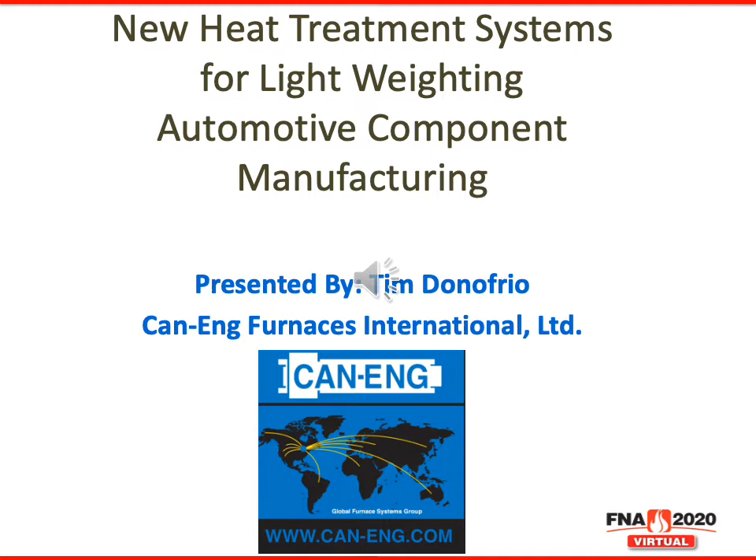The automotive and mobility market is in a state of flux, which puts greater demands on thermal processing service and equipment providers. This presentation will outline the mobility market lightweighting trends we see today, a focus on recent advancements in the use of aluminum components and product applications in vehicles, a review of thermal processes, both conventional and newly developed applications for these lightweighting components, the challenges associated with the new aluminum component thermal processing solutions, and in closing, a review of what's headed down the technology pipeline. What will the future challenges be for both processors and equipment builders?

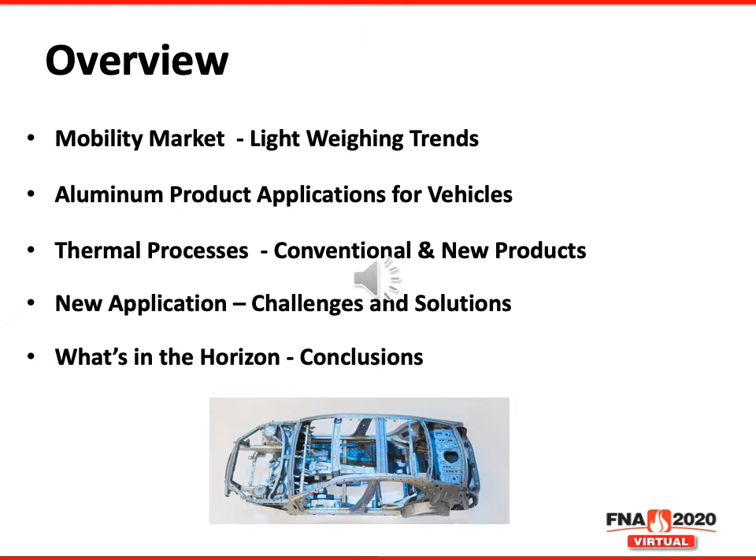Lightweighting trends for aluminum vehicle components. There should be no surprise that there's been a constant push to reduce the overall weight of vehicles as a means of reducing fuel consumption as well as emissions. The Center for Climate and Energy Solutions reports the transportation sector is the largest direct source of U.S. greenhouse gas emissions, surpassing the power sector in 2015. Cars and light-duty trucks, including pickups and SUVs, are responsible for about 59% of transportation emissions, while medium and heavy-duty vehicles, which include tractor-trailers, large pickup trucks, vans, delivery trucks, buses, etc., produce about 23% of the transportation emissions.

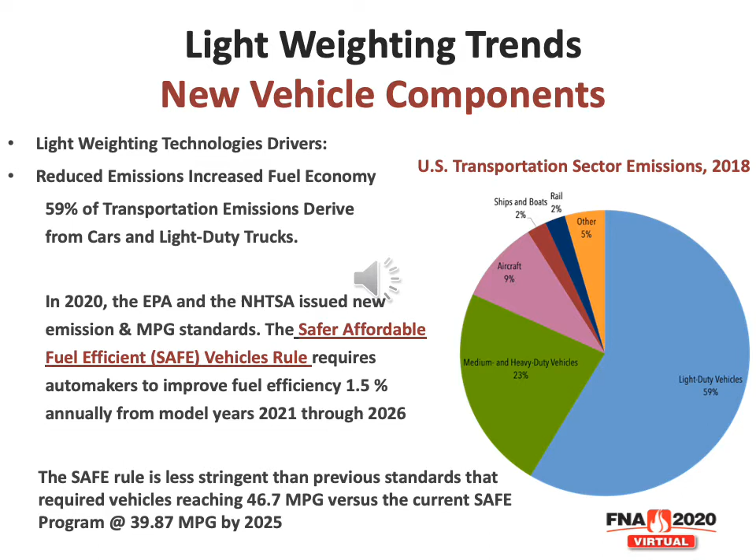In March 2020, the EPA and the National Highway Traffic Safety Administration issued new greenhouse gas emission standards and fuel economy standards for new passenger cars and light-duty trucks. The Safer Affordable Fuel-Efficient Vehicles rule, known as the SAFE rule, requires automakers to improve fuel efficiency 1.5% annually for model years 2021 through 2026. The SAFE rule is less stringent than the Obama-era rule it replaced. That rule would have required automakers to improve fuel efficiency 5% annually for model years 2020 to 2025, reaching 46 miles per gallon by 2025, versus the current SAFE program, which requires 39.87 miles per gallon by 2025.

The most significant trend in the mobility market is the increased number of electrified vehicles produced. The automobile industry has been a beacon for technological innovation and a guiding light in how people change the way they live. The time for change has come again, and some report that the levels of mobility change coming over the next 10 years are likely to exceed those of the previous 50 years. Key to these developments are four trends most easily remembered by the acronym ACES: autonomous driving, connectivity, the electrification of vehicles, and shared mobility.

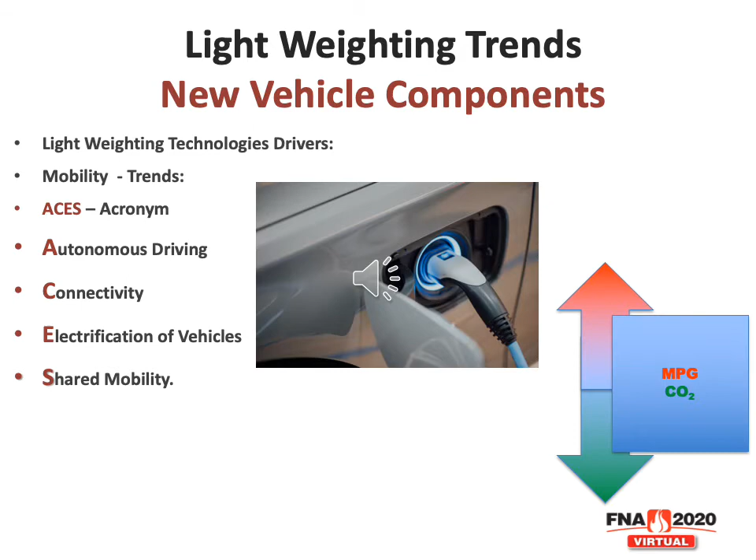With all good technologies, there comes a time when buying the alternative no longer makes sense, as with cell phones in the past, or even color TVs in the 1970s. Predicting the timing of these shifts is difficult, but when it happens, the whole world changes. It has become clear that the 2020s will be the decade of the electric car. According to Bloomberg New Energy Finance, battery prices fell significantly and are on path to make unsubsidized electric vehicles as affordable as their internal combustion engine counterparts in the near future. This will start the mass market liftoff for electric cars, which is predicted around 2022. Furthermore, by 2040, long-range electric cars will cost less than $22,000 in today's dollars, according to these projections, where 35% of new cars worldwide will be plug-in.

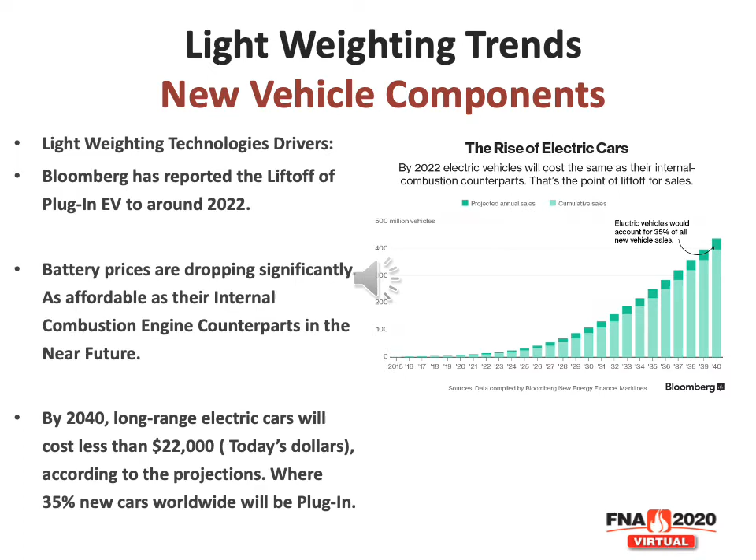As vehicle manufacturers today push the envelope of lightweighting technologies, so do they impart opportunities for the development of new products, materials, manufacturing methods, and new thermal processing technologies. According to vehicle designers, a 10% reduction in vehicle mass equates to approximately 6 to 8% reduction in vehicle energy requirements, which does promote enhanced electric vehicle range capability. However, downsizing has its limits, which is leading developers to seek out new approaches to managing these new components. The vehicle body accounts for approximately 1/3 of vehicle mass, which includes body-in-white components. Advancements in lighter weight body structures through the use of ultra high strength steels, carbon fibers, aluminum, magnesium, and new joining technologies are all being used today as a means of reducing automobile mass.

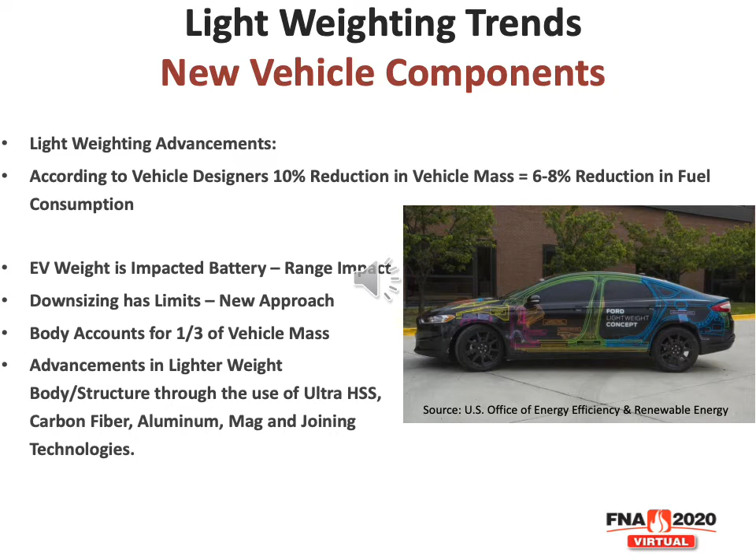In an era of lightweighting technology advancement, we see a common trend where steel components are being replaced with lighter weight aluminum components. We see automotive manufacturers expanding the use of lightweight technologies and exploiting the use of aluminum materials in high volume vehicle assemblies. Traditionally, we have seen aluminum incorporated into various forms such as powertrain castings and suspensions, as well as sheet and extruded shapes for the body, externals, and bumper structures. But today we see lightweighting materials being incorporated into high-volume automotive platforms in the form of thin-walled structural node castings or body structure extrusion stampings. Examples of this can be seen in the F-150 truck platform conversion to aluminum. Through the integration of lightweight aluminum panels and structures, engineers yielded benefits in smaller powertrains to drive the vehicle, reduced suspension burden, and less elaborate structures.

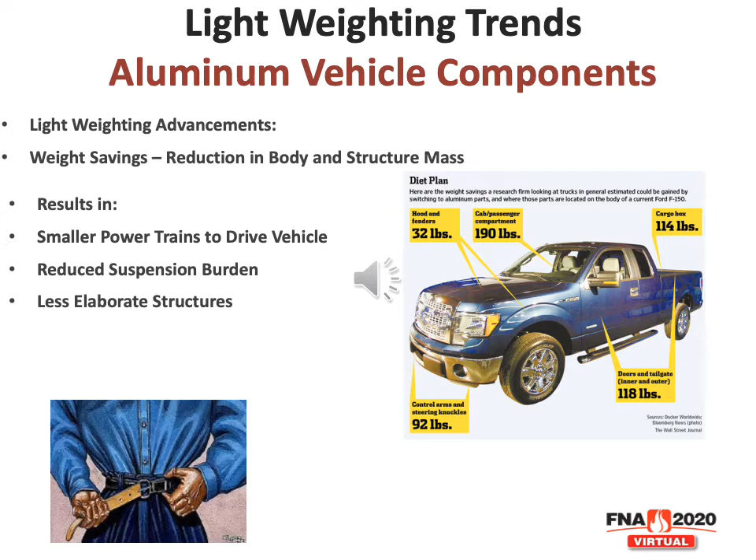By 2020, net aluminum demand is expected to increase to 570 pounds per vehicle, due to the increases for all vehicles utilizing aluminum enclosures, body-in-white, and chassis components. These demands are a result of manufacturers' desire to meet long-range greenhouse gas emissions goals, as well as satisfying the ramp-up of electrified powertrain and battery electric vehicle platforms, which use greater amounts of aluminum sheet, extrusions, and castings for weight savings to achieve the range targets. It is also reported that body enclosure components will make up the largest growth potential moving forward.

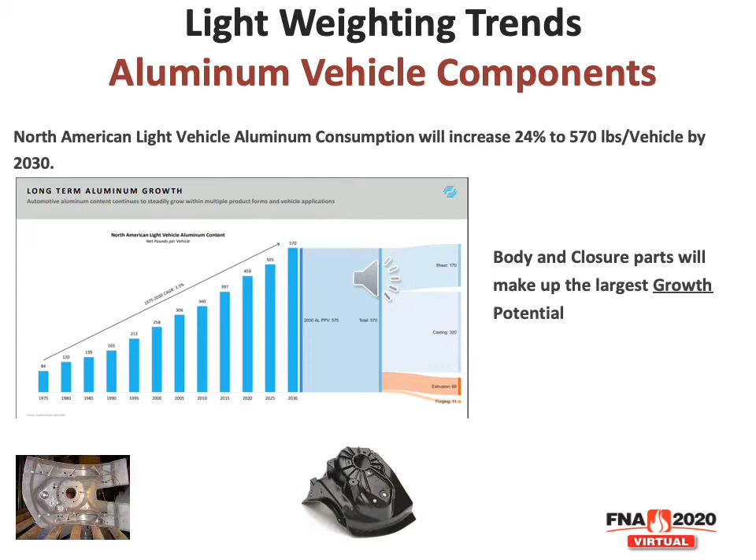Vehicle manufacturers today integrate aluminum components in considerable applications that include closures, body-in-white, chassis, powertrain, driveline, transmission, heat management, braking systems, steering, wheels, and trim, some of which are covered in the images shown in this slide. This presentation will focus on new thin-walled casting components used in vehicles today as part of structural and crash management system components, body-in-white, chassis, and electric vehicle components such as battery cases.

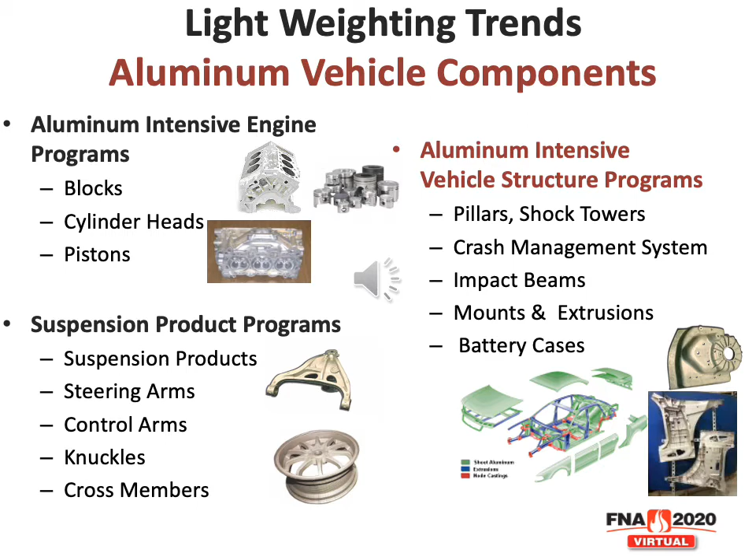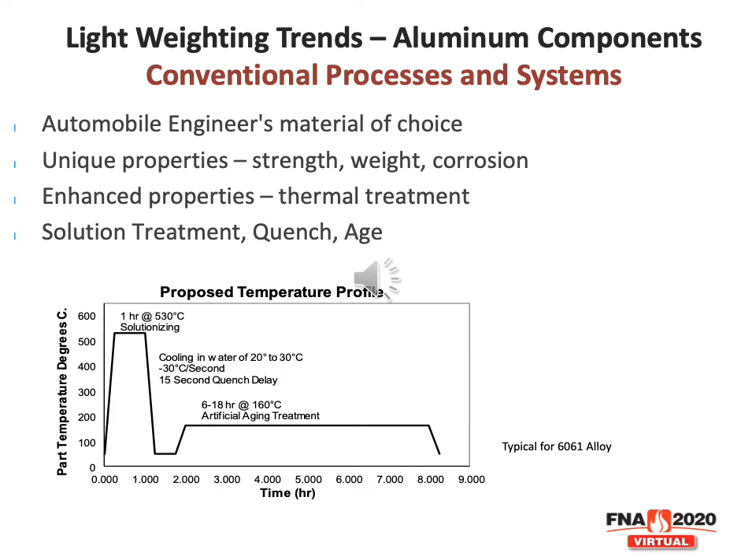Aluminum has been a highly recommended source material for castings by vehicle engineers for lightweighting applications, largely due to unique strength, weight, and corrosion properties. Furthermore, casting properties can be enhanced through novel casting methods such as vacuum high-pressure die casting and post-casting thermal treatment processes, which can be tailored to provide the engineer with a lighter, cost-effective alternative possessing strength and ductility performance levels that are comparable to previously developed steel stampings and/or multi-component fabricated assemblies.

The implementation of newly developed aluminum components into automobiles does come with its challenges, which will need to be overcome in order to be successfully implemented. This paper examines the following: challenges developing non-traditional thermal heat treatment processes for new aluminum castings developed to replace the previous high-strength steel family of fabricated stampings, traditional thermal processing options available to manufacturers of body components, and the challenges associated with developing new heat treatment processes, an overview of newly developed thermal processing system concepts which can achieve property and physical requirements, a focus on new quenching technologies for aluminum castings, and how new heat treatment processes can be integrated into high volume vehicle manufacturing processes.

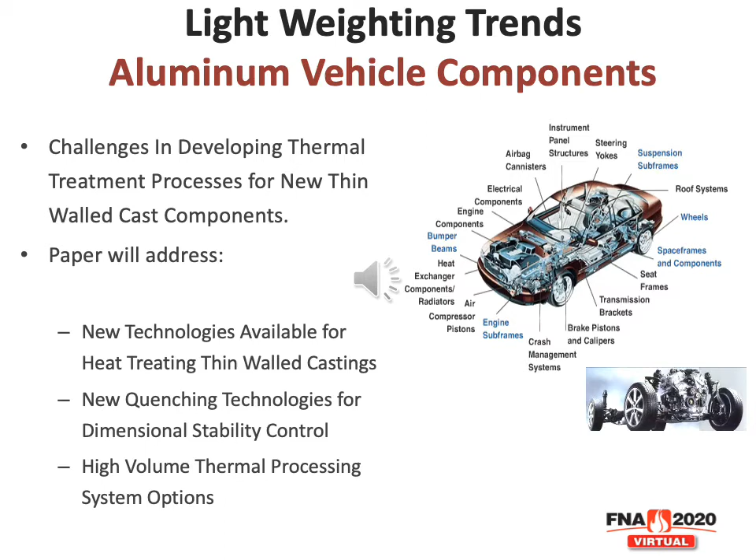The following slide represents a conventional batch type thermal processing system. In this system, parts are generally loaded into fixtures, trays, or racks and delivered to the heat treatment system by an operator, typically via a fork truck. These loads, or charges as thermal processors call them, are then individually heated and, depending on the material's alloy and property requirements, are held at temperature for various times, allowing the alloy to homogenize and then potentially discharged rapidly to a quench system. Again, the properties will dictate the thermal process required. This method is acceptable for small capacities or for thermal processors that require a high degree of process parameter flexibility, where they need to change time, temperature, and quenching methods between individual batches on a regular basis. However, it must be known that this is the least efficient system for high volume processing.

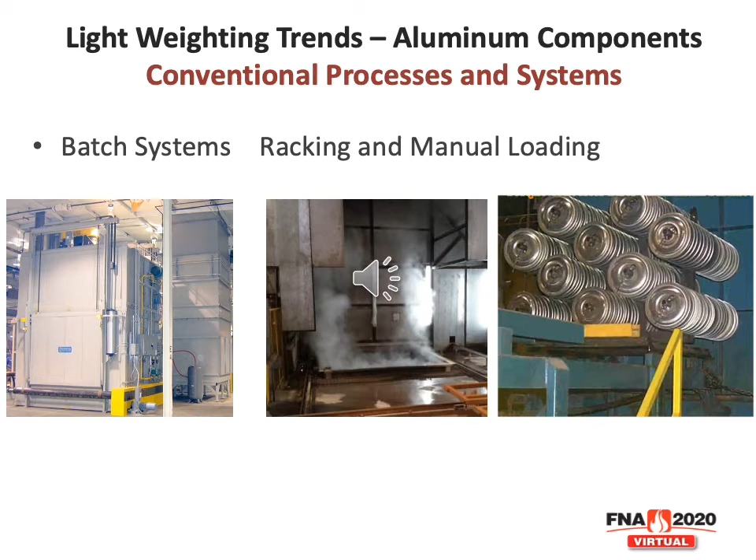The following heat treatment system represents a conventional T6 type thermal processing system. In this system, parts are loaded into fixtures, trays, or racks and delivered to the heat treatment system. These loads or charges enter the system and traverse or convey through the various solution heating and soaking zones, subsequently through a quenching stage, and finish through post-quench artificial aging, heating, and soaking zones until they are finally discharged at the opposite end of the system. This particular layout shows an inline concept. However, these systems can be arranged in a multitude of configurations. They can be arranged in a U-shaped layout or even an over-under configuration where the solution furnace is positioned above the aging furnace. Conventional conveyance systems include roller hearth, walking beam, conveyor belt, pusher, and overhead rail transfer systems as a means of conveying baskets, charges, and loads through the solution, quench, and age portions of an aluminum heat treatment process.

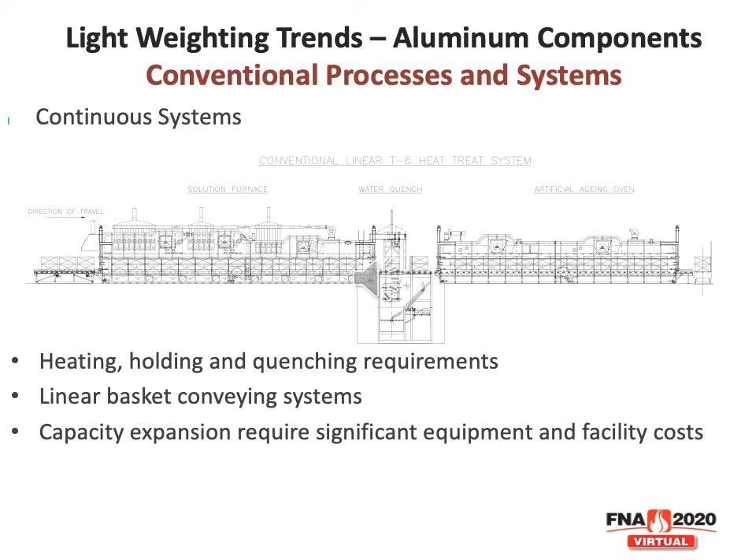Conventional linear conveyorized T7 systems consume considerable floor space, and when integrated with the quench system are significant in size and energy demand to provide the quenching capability for large mass baskets or racks. Facility infrastructure requirements are large, as well as the work in process inventory requirements to keep the system fed and backed up continuously. Energy consumption is quite significant for long linear conventional T7, T6 systems, mainly due to their large external surface area conduction losses, additional conveyor roll conduction losses, and door opening losses as a result of large baskets and trays. In addition, conveyance systems can be complicated and costly to maintain over time, as they involve many internal moving parts, are subject to thermal stresses, and integrate considerable lengths of drivetrain and drive units that constantly require attention and maintenance. Thin-walled, high-integrity casting product can be at a disadvantage as a result of heating and quenching large racks with a large number of castings loaded into it through a conventional system.

This is a result of large, dense loading of baskets and the challenges in developing uniform heating and holding of temperatures for the critical T7 process. Furthermore, the most important step in the process, which involves water quenching, can be greatly compromised by these challenges in rapidly conveying a large rack from the discharge of the solution to the quench station in the required time, and in addition, the uniform and rapid quenching can be compromised by the lack of developed quench flow through the rack due to the size of the rack and/or density of loading of that rack.

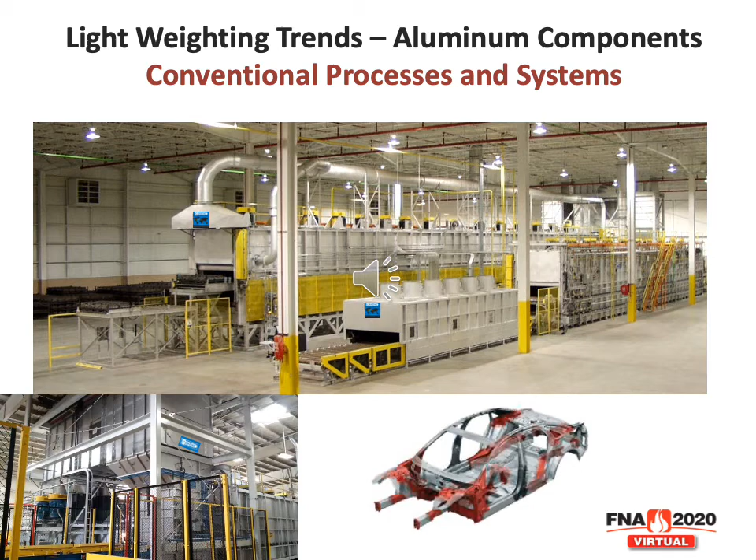In collaboration with the industry and in determining the needs of the manufacturers and processors, it was clear that they were looking for support in meeting the demands of their customers and satisfying the quality and cost pressures put upon them. Their main concerns regarding a new efficient heat treatment system for thin-walled structural components included that the system provided efficient and flexible geometry processing capability. Essentially, the system must be flexible in terms of processing parameters, as well as processing type of part and the geometry that could be processed.

Furthermore, manufacturers were looking for a system that essentially reduced their work in process inventories between operations. Essentially, a system that's capable of being closely coupled with the upstream and downstream processes, thereby minimizing the amount of inventories required between operations. A high level of importance was placed also upon ensuring the system provided best technology available for part dimensional accuracy, essentially utilizing in-house know-how and experience in preventing or minimizing part distortion as a result of the thermal process, which could minimize or eliminate the need for post-heat treatment processes, especially important for large components such as battery cases where their corresponding component mating surfaces need to accurately fit.

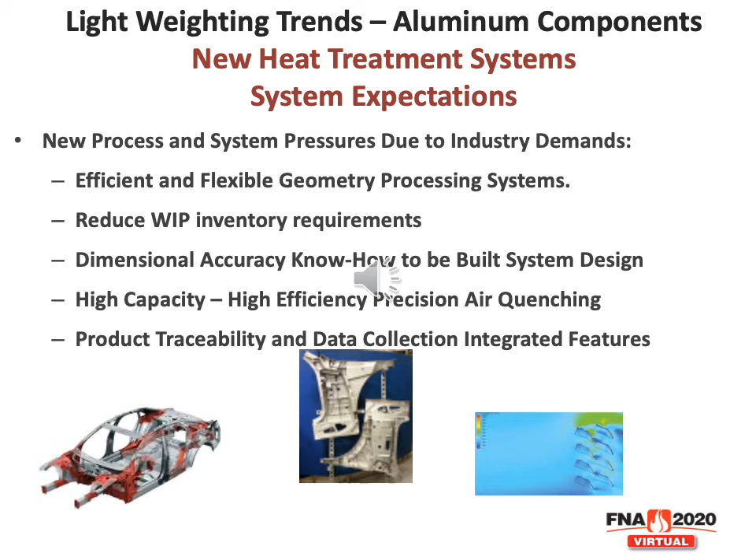Today, there are new, more efficient thermal treatment options available to manufacturers and processors of high-integrity, thin-walled structural vehicle castings. Through the development engineering of an existing rotary hearth technology, including robotic handling and precision air quenching technology, there are now options available that eliminate the challenges and inefficiencies plagued by operating a long linear T7 structural casting heat treatment system.

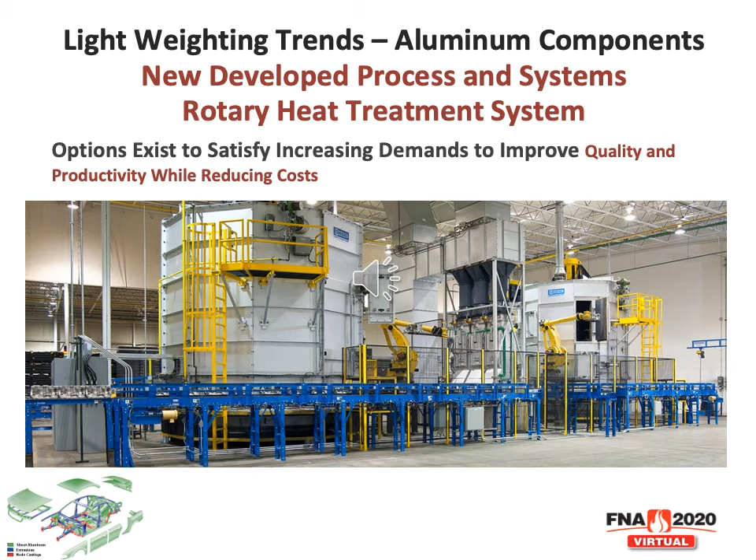In a recent applications engineering review, the linear conveying system was evaluated alongside the rotary hearth conveying system for space analysis. When laying out both systems of equal capacity, the rotary hearth concept is clearly more space efficient, requiring 35% less space than the continuous roller hearth linear conveying system. Furthermore, when comparing the system's overall conduction energy losses, the rotary hearth system provided greater efficiency over the linear roller hearth design as a function of space benefits.

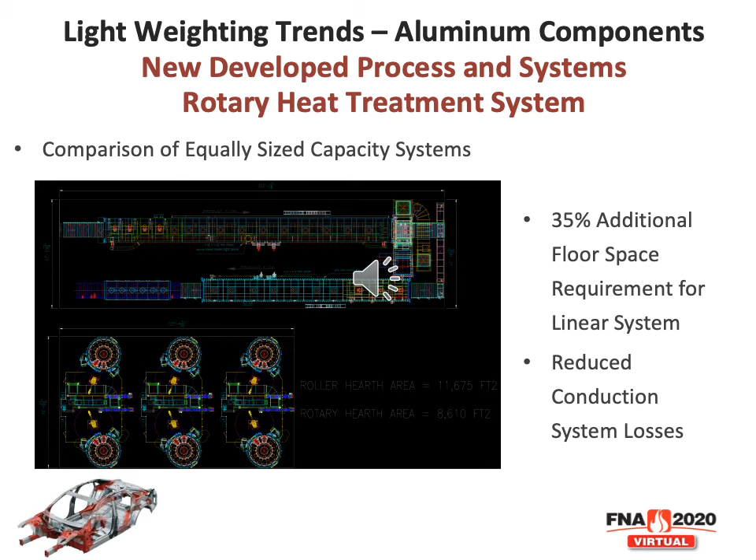These newly configured heat treatment systems offer processors both captive and commercial benefits over conventional methods when processing newly developed lightweight aluminum vehicle components. The rotary hearth heat treatment system described in this presentation just demonstrates an example of newly developed methods for processing lightweight aluminum vehicle components that improve quality and productivity while also reducing the cost pressures which processors are under.

These benefits include more compact design, less floor space required compared to conventional processes, reduced fixturing and racking mass requirements as a result of processing smaller batches, reduced cycle times associated with a more efficient heat up of smaller batches, more efficient smaller quench systems that require less floor space, infrastructure, or facility burden requirements, as well as lower horsepower requirements. Through the integration of robotic automation, minimal heat treat operator requirements, and through the integration with upstream and downstream processes, these systems do reduce work in process inventories and are considered true lean manufacturing cells.

Reduced energy consumption and emission potential, improved quality benefits, reduced product variation as a result of smaller lots for more uniform heating and quenching. The processors realize improved uniform properties as well as more uniform quench, which reduces the opportunity for part-to-part distortion. Through the integration of robots, automatic part serialization, identification, and critical part processing parameter tracking and data can be collected. These are a number of benefits that can be realized by processors.

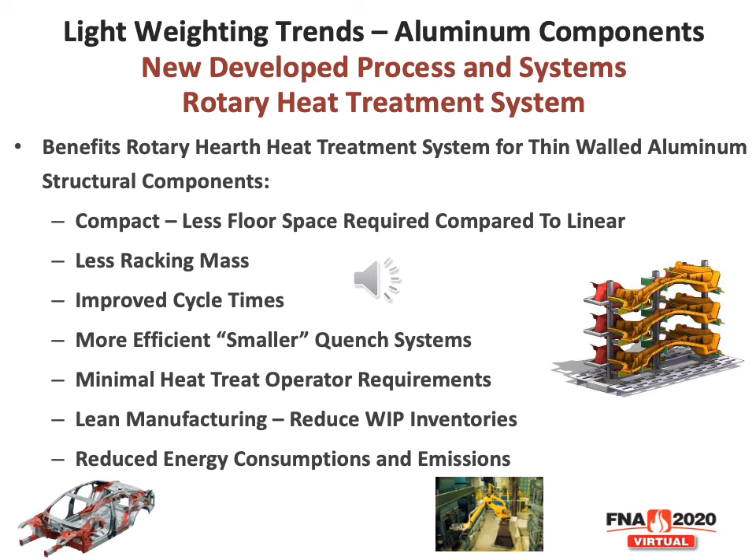What is in the future for manufacturers of lightweight vehicle component providers? Well, I certainly do not have a crystal ball. However, certainly aluminum content in vehicles will continue to increase to support the new vehicles of the future. As an example, with battery electric vehicles, further weight reductions will need to be explored to offset the conflicting interest between battery weight and vehicle range capability.